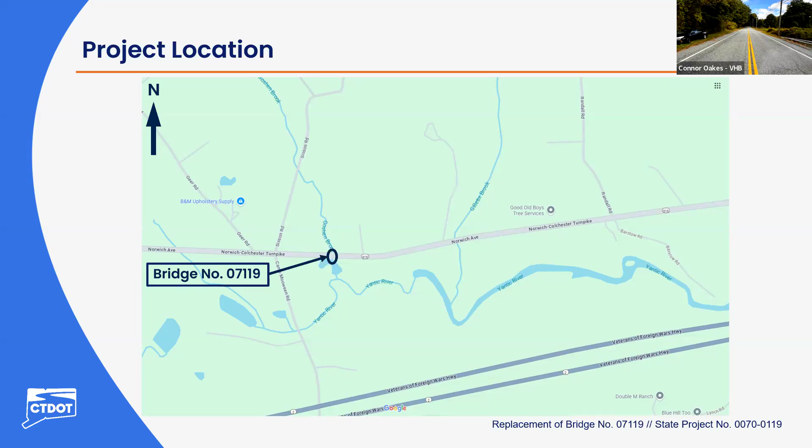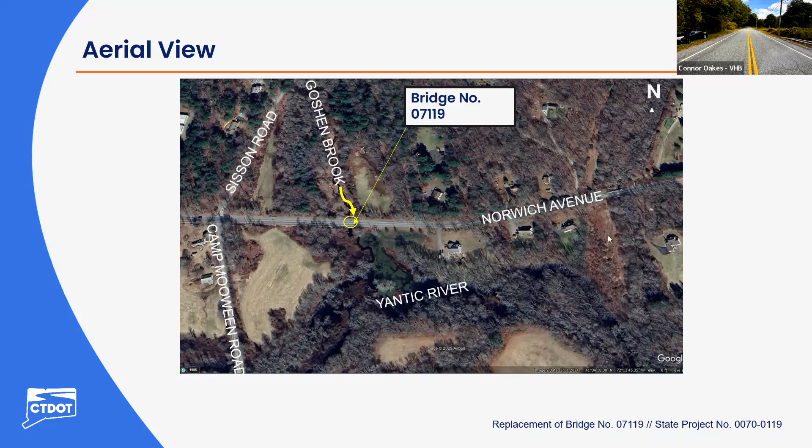There's one commercial property to the northwest, and then further to the east. Get a little better characteristic view in the next slide. So what we have here is an aerial view of the structure and the surrounding area. What we should note from this picture is that the surrounding area is primarily rural in nature, almost entirely residential as noted. And you can see a little better view of the area here as mentioned. So Goshen Brook is flowing from north to south and feeds into the Yantic River as shown. And so on to the next slide here.

So existing overview. So a quick explanation using the figure to the bottom right. So the existing structure is a culvert, which is composed of two steel pipes configured as shown in the diagram. They're made of steel and they run straight through the road and are supported on either end by concrete stacked block head walls. So the blocks are stacked and then secured together with mortar. And then at the top of the block wall is a concrete cap, which is solid and meant to protect the rest of the wall underneath it. Over the pipes, there's currently no concrete or solid material. It is an earth fill over it with asphalt pavement.

So originally, this structure was built in 1950. It is a two-pipe steel culvert with barrel 1 being totally round and barrel 2 being squashed. So in each direction, there's an 11-foot travel lane carrying a total of 1,600 vehicles per day per the 2021 ADT, which means average daily traffic. So currently, there are no sidewalks on Norwich Avenue due to the lack of demand for pedestrians.

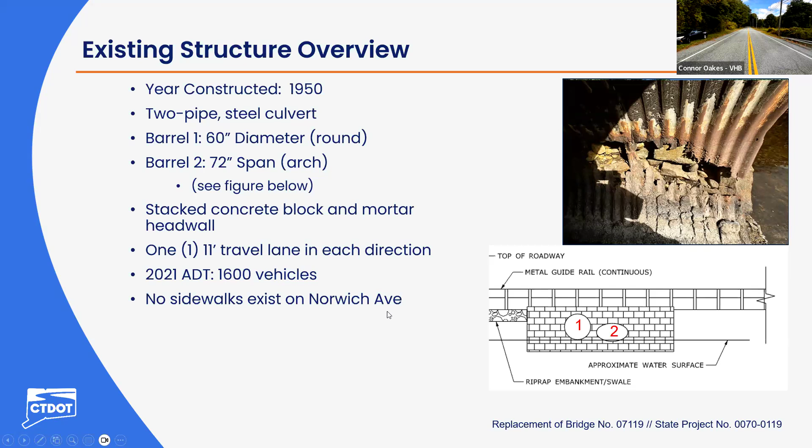So moving onward, here we can see two views of the bridge as if we are standing in the channel and looking at the sides. So on the left is the north elevation or the inlet where the river is flowing in. And then we can see here that there are some issues with the head wall as suggested. So there's missing mortar, which you can see by the very dark lines in between the blocks. Above the arch pipe on the left, there are actually voids in the wall penetrating over the pipe and creating some potential instability there. There is also debris fencing intended to block the intrusion of smaller debris, partially failing. Not that it is impeding the flow, but as we can see, there are some large timbers falling on the left side of the image on the left there.

Ordinarily, which is not easy to see from the photo due to the season, this north area is pretty heavily vegetated with brush on the edge of the embankments. And normally, maybe in a better view, you'd see that the roots of that vegetation are exposed, which is just about the only concern for the channel, is that there was some erosion occurring. But primarily, and you'll see the issue in the right photo there, the issues are with the steel pipes. There are large holes in the side due to rust to the point of loss of the steel. That's shown in the wall or the side of the pipe, the roof or the top, and then the floor or the bottom, which you can see in either pipe there.

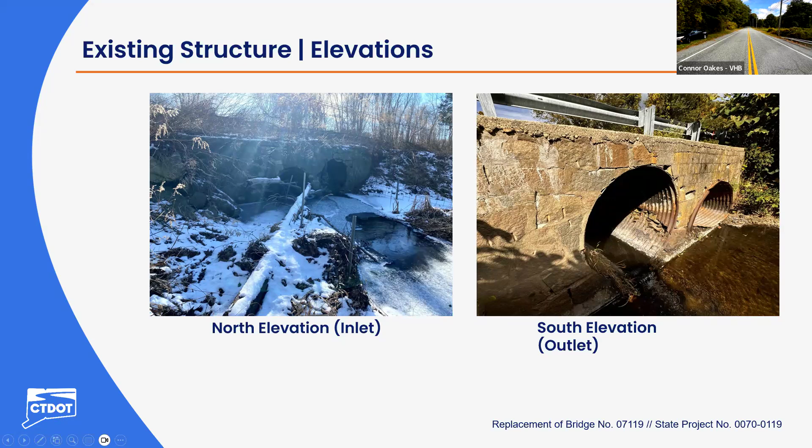So then here, just a quick view, merely to understand what it looks like if you were standing on the road, looking either east or west and standing in the center of the bridge. Really the important thing to take away here is that the existing pavement is in fine condition. It will be replaced, as it is with all bridge replacement projects, to a limit that we'll discuss later. However, the importance of the road itself is that it's very straight and it's relatively flat, which creates little to no realignment effort for the project.

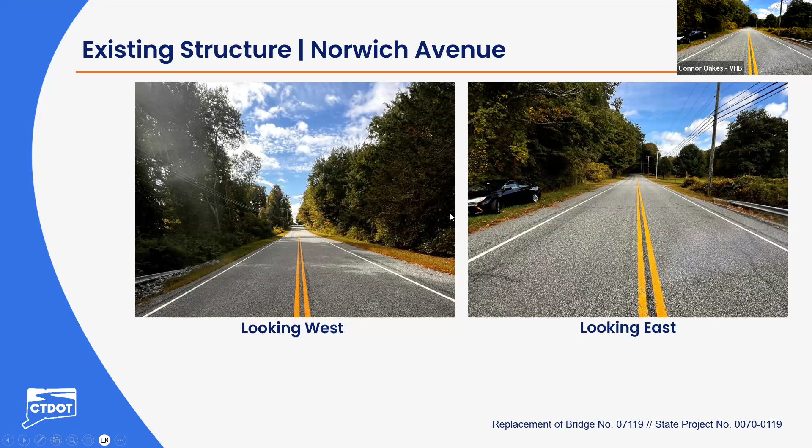And the downside of that is that due to it being at the bottom of a sag curve, so the roadway is heading downward towards the bridge on either side, the water can sit and collect. It's called ponding. So there will be considerations in the design by Fuss and O'Neill to potentially add new drainage after they perform an analysis, which would mitigate any potential effect as described.

So here's a little diagram of the existing plan view of the structure, so like an aerial view over the site. Information on the left was essentially already covered. I did mention that there were two 11-foot travel lanes, but I'll add that there's 4 to 6 foot wide shoulders in either direction. So there is some existing space outside of the travelway as is, but there will be some slight widening proposed as part of this project in consideration of cyclists, which we'll describe a little more later on in the presentation.

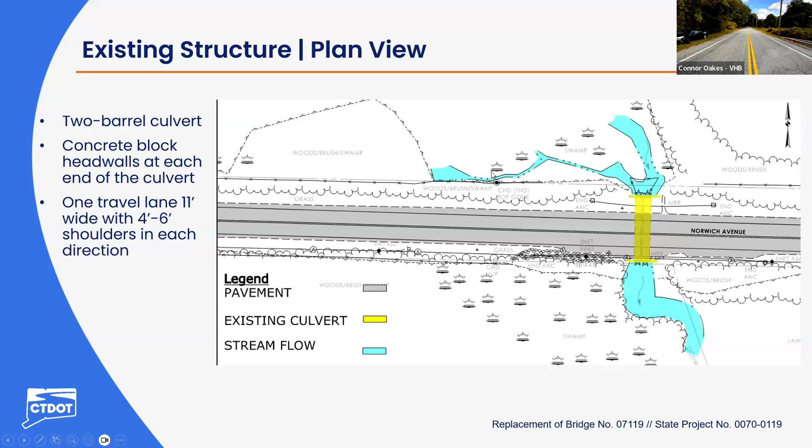You'll note that the existing structure is shown in yellow. The pavement road width is shown in gray, and then the stream is highlighted in blue. The main channel being kind of in the center, and then there is a little tributary part of it off to the left.

So the purpose and need of this project is implied by the condition, but our official purpose of this project is to address the structural deficiencies as noted, to renew and extend the bridge life expectancy and maintain it in a state of good repair going forward, and provide a structure capable of meeting current design standards and load rating requirements. It should be noted that the existing culvert and head walls during previous inspection were rated as poor for condition and thus must be replaced under this program.

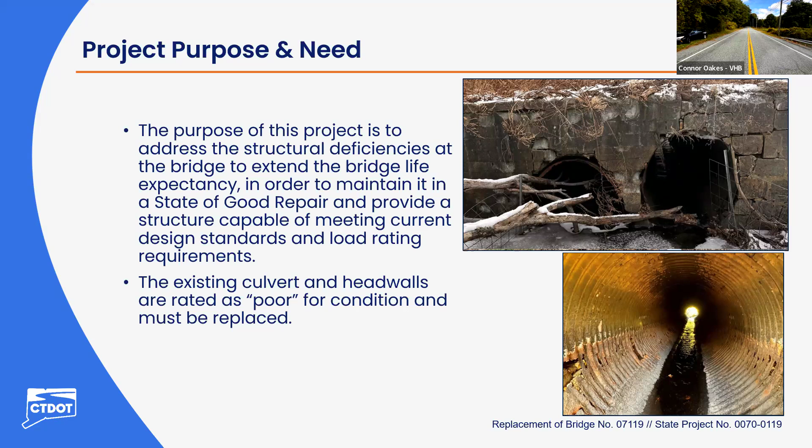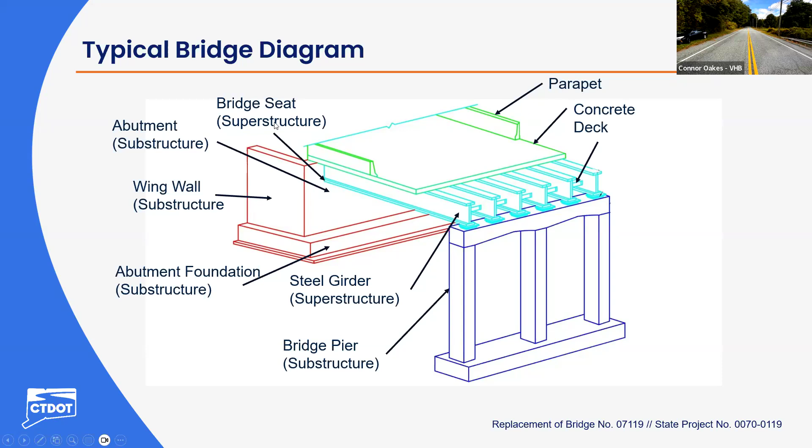There will be no pier, no steel beams. The concrete deck will, for the purpose of our understanding, extend to the bottom of where the beams are shown in this photo and be known as the concrete slab. We'll be referring to that as either the deck or the superstructure throughout the rest of the presentation. The bridge seat is where the slab sits on top of the abutment. Technically, that could be considered substructure, but for the purpose of this presentation, we'll consider it part of the superstructure. Moving onward.

So here is an elevation view, which is as if we're standing in the channel looking at the structure. And what we can see here as described is that we have a clear span over the river. And this is 25 foot from wall to wall of each new abutment. The concrete slab deck superstructure will sit right on top of the walls and be connected to them through the tie-ins of reinforcement, as will all components of the bridge.

This is what we call an integral abutment, and as you see by the orange rectangles extending downward, we have steel piles in a single row supporting the foundation very deep and allowing for no movement of the structure. Given the historical soil conditions, this was considered the appropriate design choice for foundation type. However, our designer will do even further investigation, collect on-site samples, and then make any edits to the design as needed. There will be regrading of the channel, provisions for wildlife crossing as shown by the shelves on either side, and the existing structure will be removed entirely. At the site, there will be grading of new embankments and new roadway reconstruction as well.

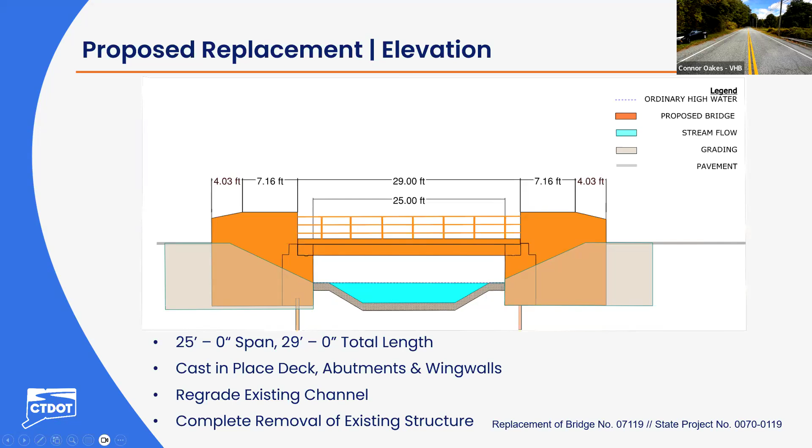Here's a view of the proposed bridge section, so as if we were standing looking down the center line of the road, eye level with the bridge. So we'll have a 3-inch pavement surface on waterproofing membrane, some reinforced bridge parapets or bridge curbs, which will be topped with bridge rail, 3-tube galvanized rail for crash protection. And then there will also be widened shoulders across the bridge equal to 7 feet.

So in consideration of the demand for cyclists, we are widening the road to 7 foot, but 5 feet of this is travel space. And then 2 foot would be what's known as a lateral buffer, which is a safety distance determined based on the roadway speed, which will allow for safe passage of cyclists along the roadway. And there are no sidewalks proposed to be added to the road due to the lack of demand for pedestrians, as previously mentioned.

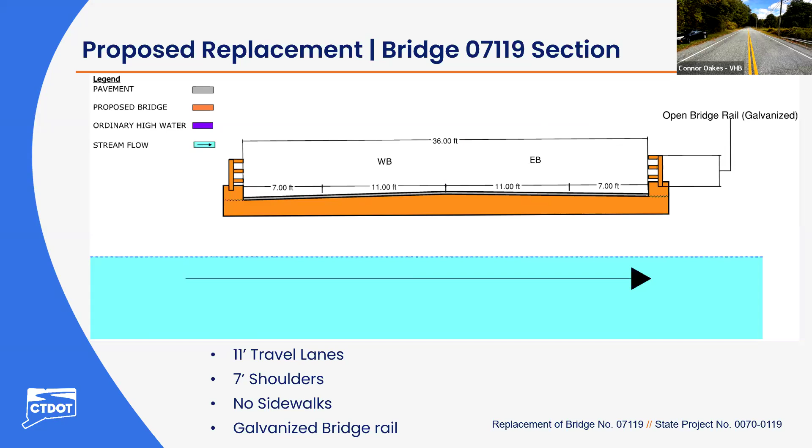So here's a plan view of the proposed structure. What you'll notice is that the site itself doesn't look all that much different from the existing. As mentioned, we are not realigning the road, and there will be full depth reconstruction, meaning we will tear the road up all the way through and then replace it in a brand new condition, even past the limits that are shown in this photo.

Off to the right and a part of the surveyed area is another driveway, which we plan to tie the roadway reconstruction into at an abutting property. And then to the west, we use equations to determine logical termination of a project, and our designer will use those and establish an appropriate limit to the west of the structure, not necessarily as shown.

From the legend, you'll note that the pavement is shown as gray, the proposed bridge is shown in orange. We have existing property lines to the north and south shown in red. And then there are state and federal wetland limits on site outlined in green, which we are currently proposing to avoid with grading.

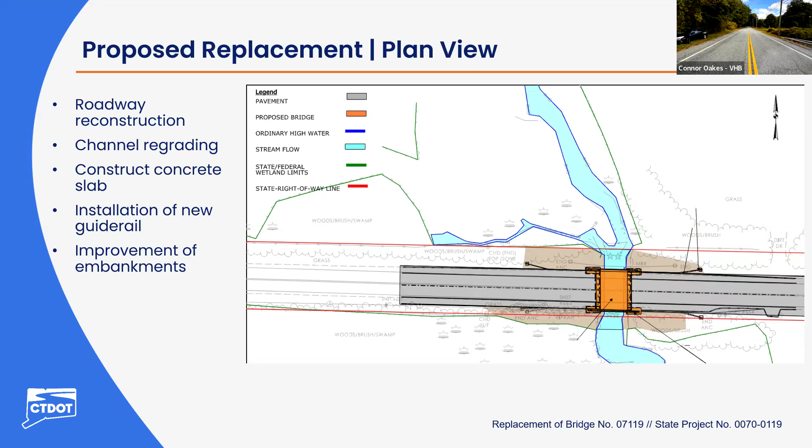So one of the more important parts of this is the traffic and the safety of the public. The most important part, actually. What we will be doing is handling traffic in alternate one way throughout the duration of the project. Given the number of cars and trucks traveling over the roadway per day, it was deemed more efficient and less impactful to the public to carry traffic over the structure in this fashion throughout construction.

So we'll be installing concrete temporary barrier, line striping, sand barrels, and signage, which will all assist in properly delineating traffic across the bridge. There will be predetermined stop locations, which will be evaluated for sightline safety. And next to these will be temporary lights to further assist in visibility at the site, which can be easily mounted on telephone poles and connected to electrical service.

The bridge will have water handling devices installed under it in order to construct components of the structure in the dry and allow for a more constructible project. During these stage and water handling phases, the bridge will be built in sections. So the south side of the bridge will be built first, as shown in orange, in stage 1, and then as shown in this picture in stage 2.

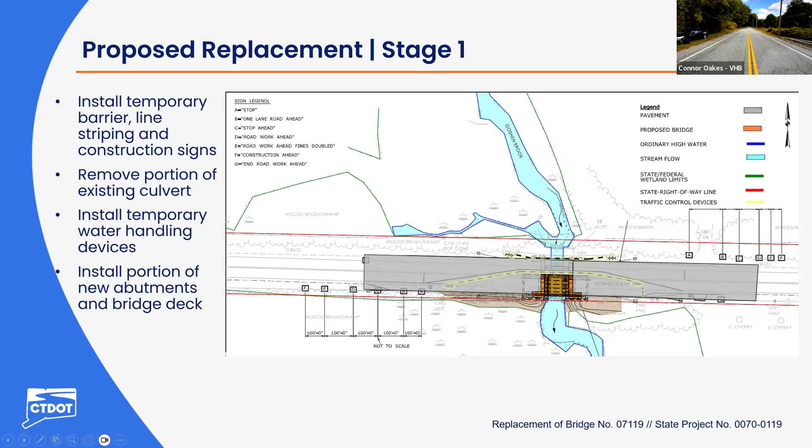Essentially, the temporary traffic devices, the barriers, line striping, etc., will all be shifted and reconfigured as needed to now allow traffic to travel on the new south side of the structure as the north side is built to completion.

And then once the stage work is done and there is safe passage over the bridge in the 2-lane configuration, this is really more construction sequencing up to the contractor at the time, but there will be provisions provided for temporary traffic control for the final operations, such as any final paving and installation of membrane after the safety rail and guide rail are installed.

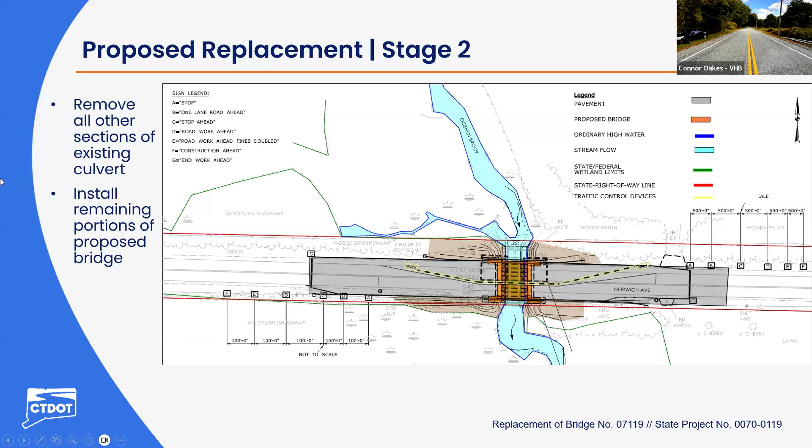Real quick, some utilities, fairly simple on this site. There's nothing underground. As noted, there are 2 telephone poles adjacent to the structure at the east and west, carrying electric, communication and internet lines as shown over the structure. The anticipated effort to relocate utilities prior to construction includes simply temporarily relocating everything as shown, or providing temporary poles and shifting the lines. So everything that you see now will move further south, which is the left side of the photo.

Some of this will be outside of the existing right-of-way and inside of temporary easements or acquisitions, as we call them, which are needed for the construction and grading of these slopes around the construction, which we'll get further into in a little bit. But the important takeaway from that is that everything that you see here, save the new bridge, so everything you see utility-wise will be back to original as shown location-wise.

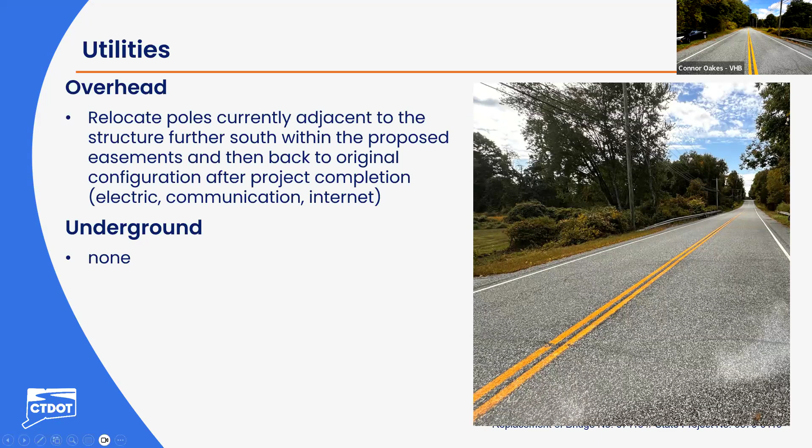So environmentally, we do anticipate a couple permits, one of them being the U.S. Army Corps of Engineers General Permit, or self-verification form. And due to the proposed anticipated impacts of the design, we anticipate a more minimal permitting process, which is reflective of the severity of the impacts to the site, and which, as I mentioned, are minimal.

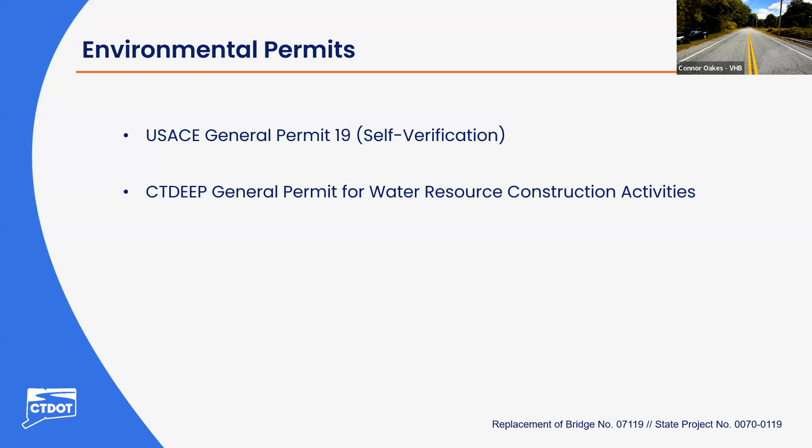As well as that is the CTDEEP, or Connecticut Department of Energy and Environmental Protection, general permit for water resource construction activities, which will also cover any permitting requirements and stipulations pertaining to the wetlands that I did mention on previous slides. And that should, at this time, conclude permits.

So before I hand this over, I just want to quickly show what we have as a right-of-way sketch here. As mentioned previously, we have right-of-way lines running along the road, north and south, shown in red. So everything in an existing condition is within the existing right-of-way. However, in order to remove the south side of the structure, there would be a need for a construction easement to go beyond the existing right-of-way with equipment and remove it, as well as grade the areas which you see in the neutral color shown next to the stream, which is blue.

So all of this is work that is necessary for the construction of the bridge and will occur in a temporary fashion beyond the right-of-way. And then most of the property would be returned. There would be potential permanent acquisitions in a minor fashion around the guide rail on the south side of the bridge only, to allow for future maintenance access to the bridge around them.

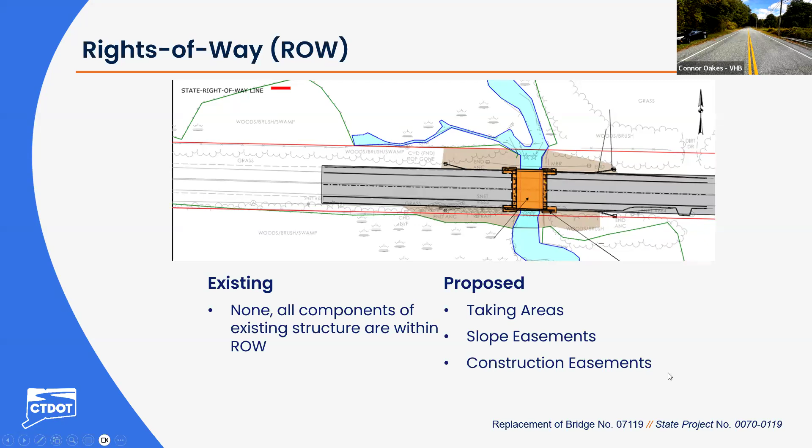My name is Jack Carlson, and I serve as an assistant project coordinator with the department's Division of Rights of Way. Our office is responsible for acquiring the property rights necessary to carry out transportation projects. As mentioned early in the presentation, this project will require the acquisition of property rights. I'd like to take a few minutes to walk you through our acquisition process.

But before I begin, please note the specific right-of-way impacts are still being finalized and may change as the project design progresses. Additionally, any needed property rights will be acquired in accordance with Connecticut General Statutes Section 13a-73 and 13a-98e, as well as the Uniform Relocation Assistance and Real Property Acquisition Policies Act, commonly referred to as the Uniform Act. Next slide, please.

A rights-of-way agent will then be available to meet with the property owner to explain the project details, discuss the specific impacts to the property, and go over the department's offer. Property owners will then have a reasonable amount of time, typically 30 days, to consider the department's offer and enter into negotiations. If an agreement on value is reached, the department will then prepare all the necessary paperwork to record the deed and property maps on the town land records.

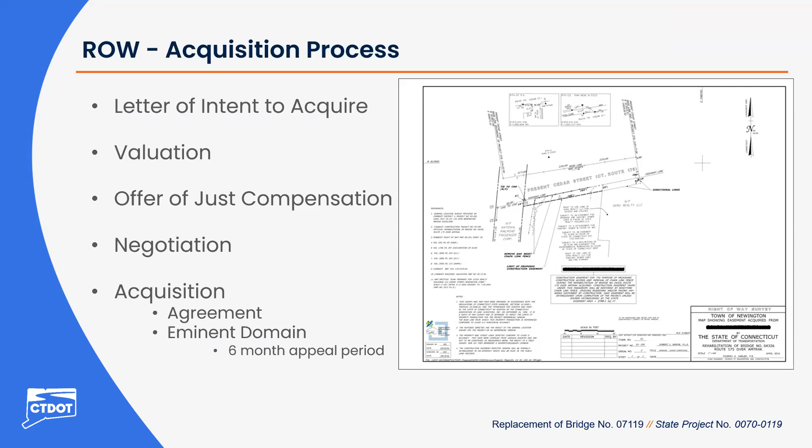At this time, we are anticipating construction to begin in the spring of 2028 and to be completed in the fall of 2028 as well. We are currently estimating a construction cost of approximately $2.85 million, which will be paid with 80% federal and 20% state funds. No funding will be required from the town. And please note that these are preliminary and they are subject to change.

And now at this point, I will turn the presentation over to Mark Levesque, who will be the MC for the question and answer portion of tonight's meeting. Thank you. Thank you, Leslie, Connor, and Jack. As Leslie mentioned, my name is Mark Levesque. I'm project manager with VHB, and I'm going to be MC for the evening. First of all, we want to thank everybody for joining us, whether it be on Zoom or watching on YouTube or watching later on YouTube. The purpose of this meeting is to provide the public with an overview of the project, get feedback, and answer any questions you might have. With that being said, we're going to now have a live question and answer session with the design team, able to answer any questions you may have.

There's 3 ways to ask a question, and I think Leslie already briefed you, but I'm going to remind you again. First is by email. It's dotproject70-119@ct.gov. Second is by voicemail. Phone number is 860-594-2020. And we ask that you include the project number with that voicemail. It's project 70-119. And then that makes sure it gets to the appropriate project team. And the third is this question and answer session on Zoom. There's a tab on your Zoom screen that says Q&A. Just click the tab and type your question and hit send. This is going to only be available during this live session, not after. If you're watching on YouTube, you can ask via email or by calling that number. All 3 of these I've posted to the chat. The email and voicemail is going to be available up until August 7th, 2025. That's 2 weeks after this meeting. So you can ask the question a week and a half from now, and we'll get back to you on that.